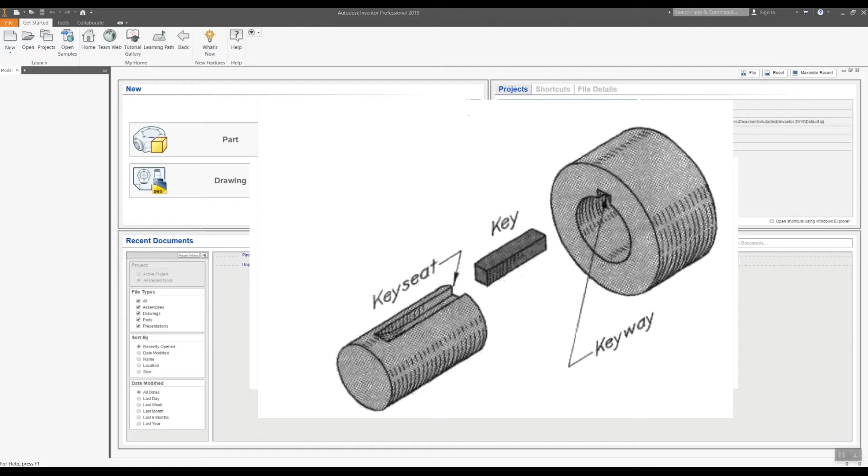Overall, this is a pretty fun drawing, so let's go ahead and dive into it. As always, I'm going to go New, Metric, Standard Part. I'm going to hit Create.

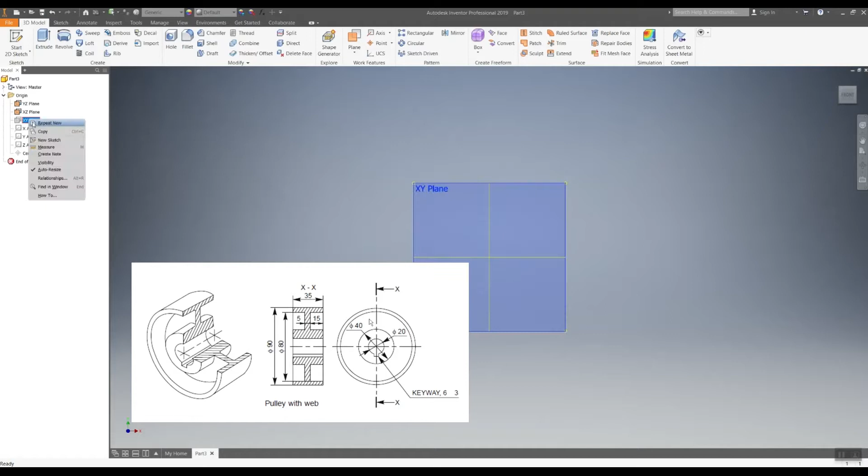This brings us to our model space. As always, I turn on my visibility, like that. As I said earlier, I'm really just going to draw this front view and sketch that, then revolve it around. Well, that doesn't make much sense until we really see it. So let's go ahead and start our sketch and pick our plane here.

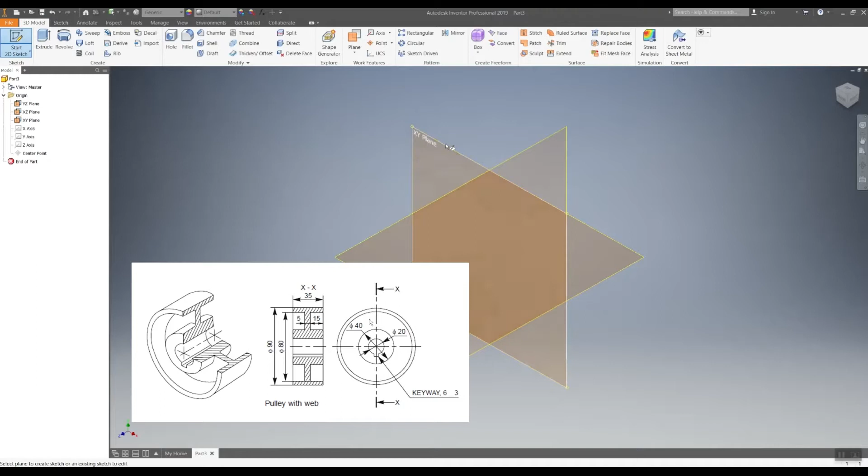Now what I want you to notice is there's a hole in the middle, so there's a spot we're going to revolve around and keep open. If you look, the entire diameter of it is 20. That means if we go up 10, that should get us to the bottom of our object right there. So I'm just going to create a line anywhere and start it over here—doesn't matter the dimension, I'll come back and dimension that to the origin at 10.

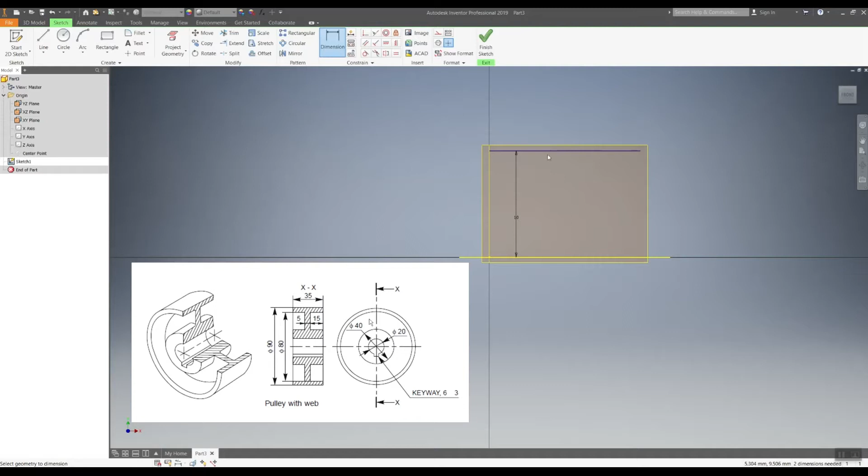How long's this line? Well, we are drawing half of it right now. So I'm going to cut everything in half and then mirror it at the end to learn another new command too. Right now it is 35. Half of 35 is 17.5, so this line here needs to be 17.5.

Now going up, what we see here is the thickness of this outer part of the pulley. If we have a diameter of 20 and a diameter of 40, that gives us 20. Now this is going to be half because these are all in diameter and we need radiuses. So we are going to go up 10.

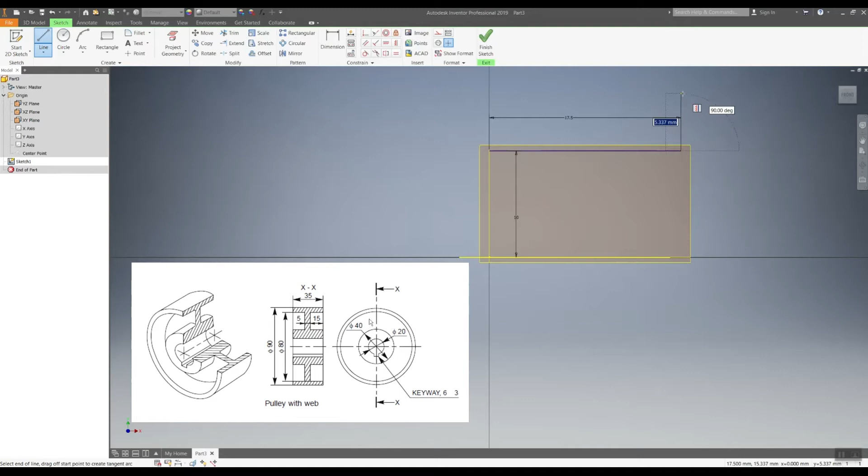Now it says the part to go in here is 15. So I'm just going to go 15 in.

Again, the height of this part—we have a 40 on the outside and an 80 on the upper end. So if we divide that in half, that is 40. And then we had to go in half again because we're dealing with radiuses, so that should be 20.

This top part is 15 again. This top right here is a thickness of 10—90 minus 80. Oop, we have to cut that in half because again we're dealing with radiuses.

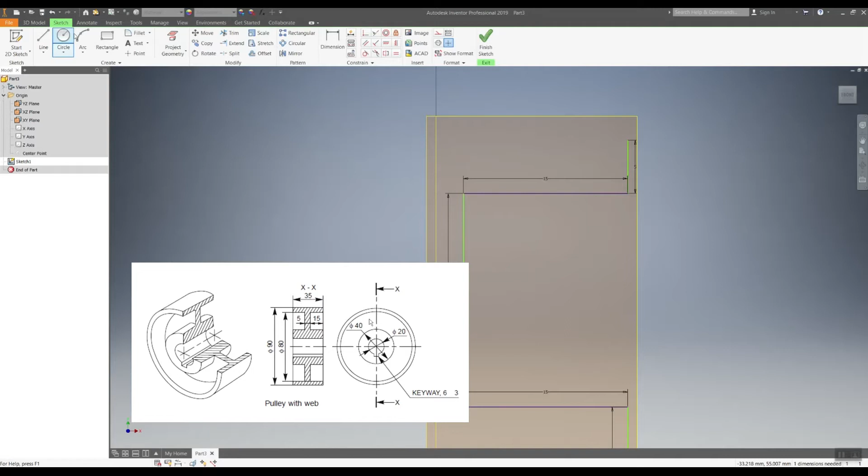And then that line is going to come over here, and we're ultimately going to close it down. So this right here now represents this part, half of it over here.

I said earlier we can mirror it, and the mirror command is actually really helpful. You can see it right here. If we click on it, basically it's going to ask us for a profile and an axis, and we have both of those. So let's click on mirror. First, it's going to ask me to select what—I'm going to select everything I've drawn, except for this line right here, because that's my mirror line. Next, I'm going to go up here, click on the mirror line, this is where I want it to be mirrored across, and I simply hit apply and done.

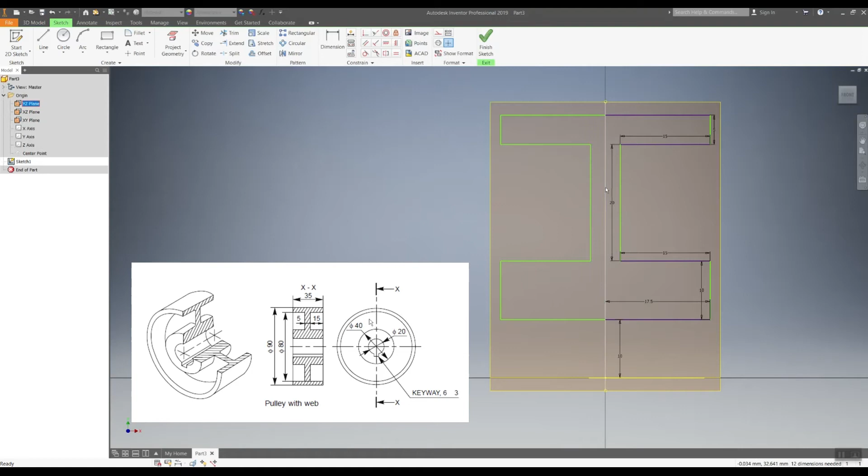Now my object's starting to look more like the other one. I can get rid of this middle line here and just keep it out there. I need this line here still, and in fact, I'm going to put a line from my origin over here—this eventually is going to be my axis line to spin the entire thing around.

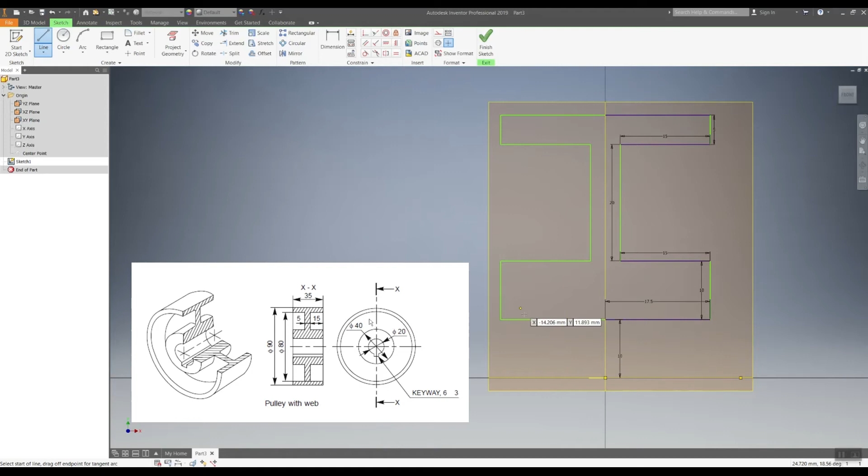You might not see it yet, kids, but we're really two clicks away from being done. I'm going to finish my sketch here, and go to my Revolve Command. My profile lights up—that means I have everything closed. My axis is going to be this bottom line right there. And look.

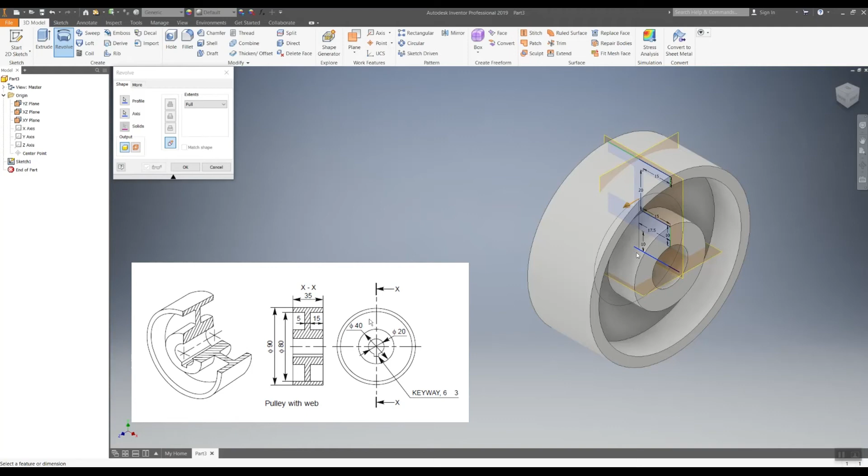This looks identical to the drawing, if I could spin it right, that we have over here.

We're not done yet though with this drawing. We have a nice little keyhole that we have to finish up, and this keyway is going to be drawn on this face. You can see it is 6 by 3, so that means it's going to be 6 wide, 3 high.

How are we going to do that? We're just going to start a sketch on this plane right here. As you can see, this is 3 by 6, so that means I have to go 3 over in one direction, 3 up, 3 in the other direction for a total of 6.

I'm going to come over here and just draw down 3, over 3, and then up. I'm going to do the same thing over here, over 3, and go up until these are all connecting perfectly square. Doesn't matter if I go up into this section—the important part is I'm cutting my keyway out down here. So the distance up here could be 1 millimeter or all the way up to here, it doesn't matter, just as long as it doesn't cut into the top object.

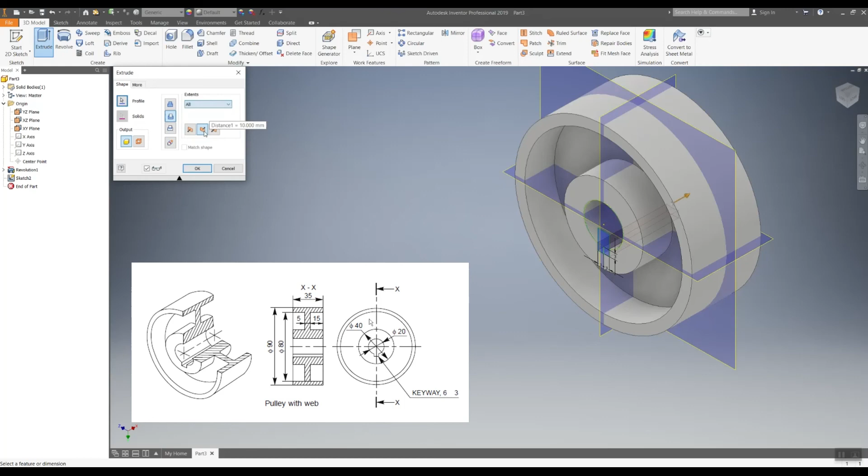Almost done, we finish our sketch. I'm going to come over here to extrude. I'm going to extrude this bottom part over here, go the other way, all the way through the object, and then hit OK. There we go—there's my keyhole, kids.

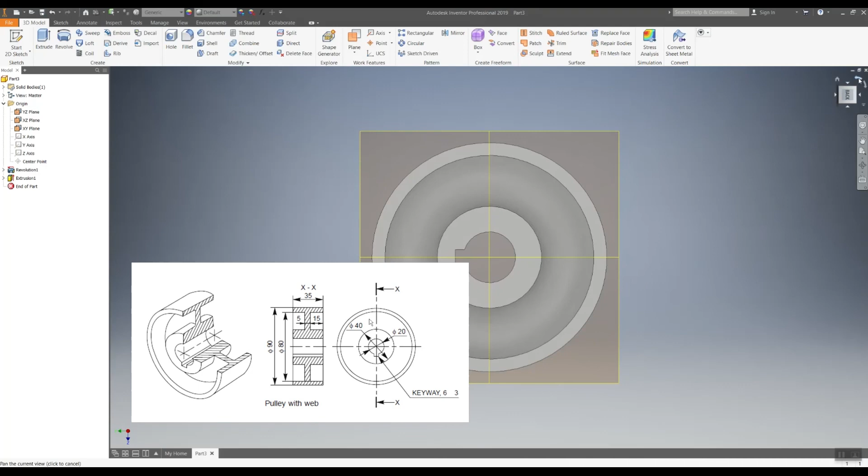I'm going to set my current view to front. Looking at the isometric down here, you can see that my view, once I rotate it poorly over here, looks identical to my drawing over here. And we did it by using revolving—we drew our front view, spun it around an axis to create a classic pulley.